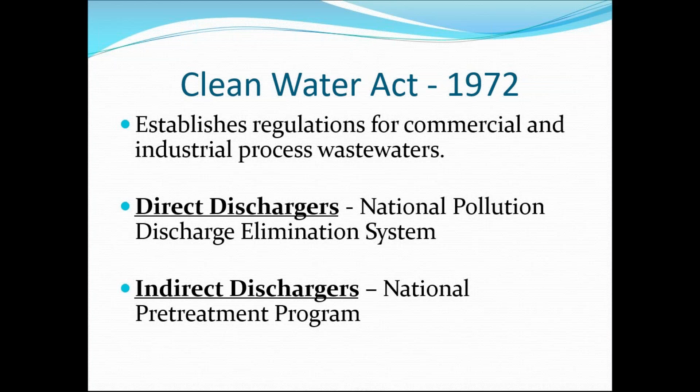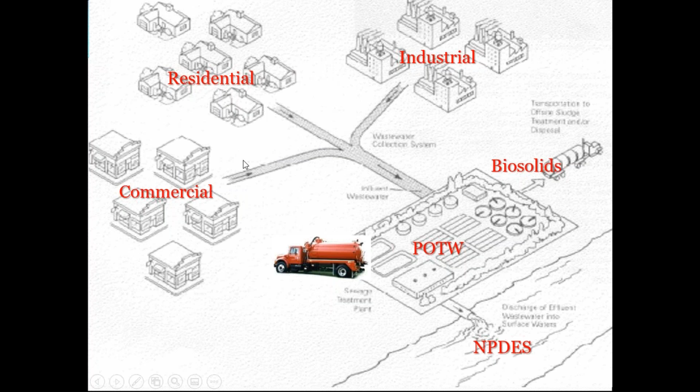So these are the elements that we are designed to prevent, to be proactive. Pretreatment is a proactive program. I combined all of the non-domestic into one little graphic here, but when they discharge to your POTW, a publicly owned treatment works is both a wastewater treatment plant and a collection system.

So pretreatment being proactive is designed to minimize or eliminate the issues that may occur in your collection system, such as obstructions with oil and grease, explosions that may happen from hazardous waste or vapors or fumes, and injuries to workers, which is very important to me.

Both when I was local and here at EPA, I'm very concerned about worker health and safety. We want to make sure we protect them. There's a lot of people working in the collection system and also at the wastewater treatment plant.

We want to ensure that we protect the biological and chemical processes of the wastewater treatment facility, to ensure that any non-domestic users, with high or low pH, don't create an interference condition on your wastewater treatment plant that may affect its ability to treat and cause pass-through into surface waters or violations of your permit.

Any partitioning of pollutants may also go to your biosolids and really impact your decision on whether or not you can land apply it, or have to send it to a landfill, or maybe have to incinerate it. So you really want to make sure that you're protective of those conditions at your treatment plant.

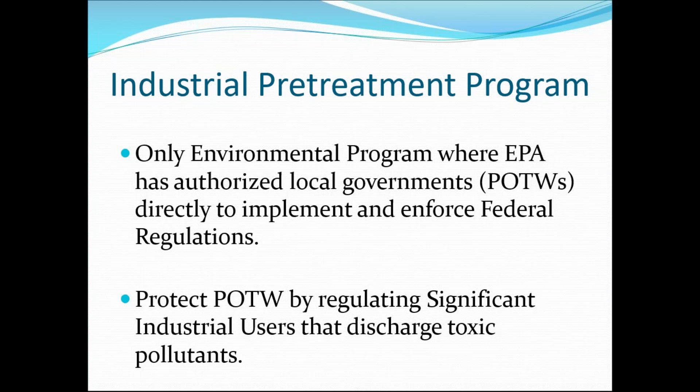Because a lot of times the chief operator, the voluntary pretreatment coordinator, is also the person who jets out the lines. They also can use some help protecting the wastewater treatment plant from any sort of non-domestic discharges that may occur in their plant.

Is there potential to discharge industrial loading in such a quantity, concentration, or volume as to cause impact to your wastewater treatment plant? That's what I look at whenever I go out and evaluate cities to determine if they need an approved pretreatment program.

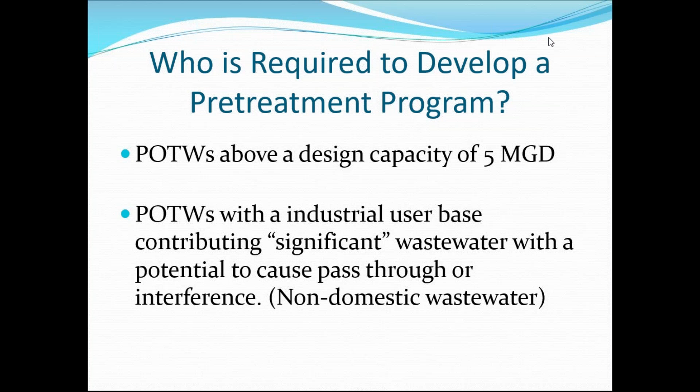So for me, audits are an ability to go out to that particular city to try to understand the city. I'm only there for a week at the most, so how much can I understand the city? I try to visit breweries, I try to visit coffee shops, I try to visit local restaurants just to get a flavor of the community, and then I'll also mountain bike if I can.

But I also want to get to know the pretreatment coordinator. I want to understand how he or she operates, how he or she thinks, and whether there's any opportunity for me to provide training, to provide outreach, and also to learn from them on how they operate and how they do things.

So I'll look at the legal authority, I'll look at procedures on how to implement the program. Again, we're talking about permit writing, sampling, inspections. I'll look at what is their funding, what is their resources, how defensible, how current are their local limits? Does their enforcement response provide the consistent response to any sort of violations that occur at a pretreatment program?

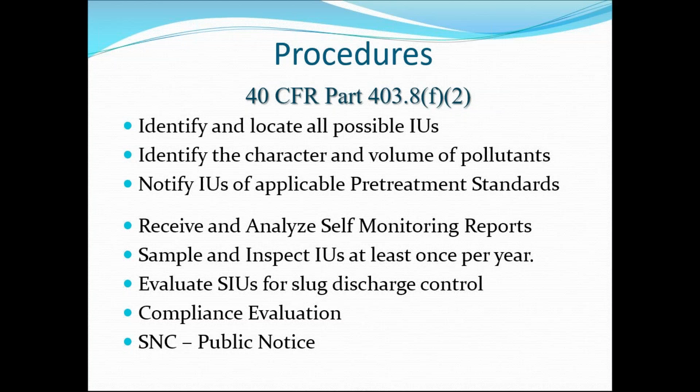For the industrial waste survey, this is an important piece of a pretreatment program. When I was a local pretreatment coordinator, we had 2 cities and 23 outside contributing jurisdictions or sanitation districts. It was a commitment for us to go out and try to identify industrial users coming in and out of the service area, and to figure out resources and collaboration with other districts to determine what pollutants you have, what is the character, what is the volume, and more importantly, what is the impact to your wastewater treatment plant.

So this is always a continual process. When I go out and do audits, I have a practical perspective on this. I expect commitment from the program, but I don't expect 100% of it to be current, because there's that human element. Let's face it, sometimes you have a bad day, sometimes a low energy week, sometimes things just don't work out professionally. So the important piece about this industrial waste survey is that you have procedures, resources, and commitment, and you're moving forward trying to identify.

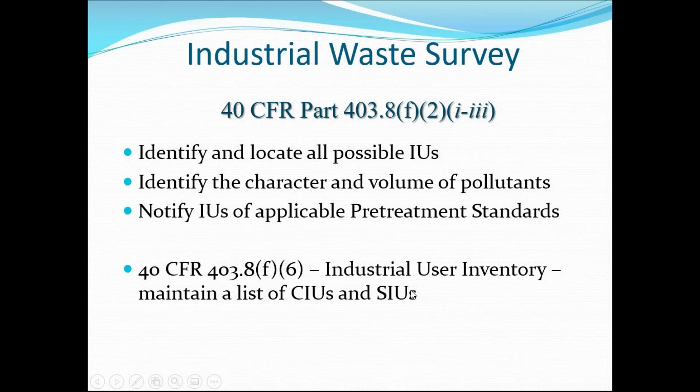The inspection part of it, how you gather information, is really important because you really want to get down to the industrial user inventory, where you start to develop this list of CIUs and SIUs in your service area. I'll get to that in a couple slides.

There's no doubt about it, the industrial user inventory is very important. This gives you your base of information that you then develop your pretreatment program and implement the procedures from. You really want to characterize who's coming in and out of your service area.

And Andrea, if there's any questions as we're going on, by all means feel free to jump in, and I'd be happy to talk about some of these questions. Yes, we'll do, Al. Thanks.

Okay, so again, I talked about the industrial waste survey, I talked about the facility inspections. What's really important too is follow-up activities, because if we go back to the regulations, you're required to identify industrial users, you're required to characterize them, and you're required to notify them of applicable pretreatment standards. So follow-up activities is very important - that could determine whether or not you issue them a permit or institute best management practices for them. I'll talk about that in a different slide down the road.

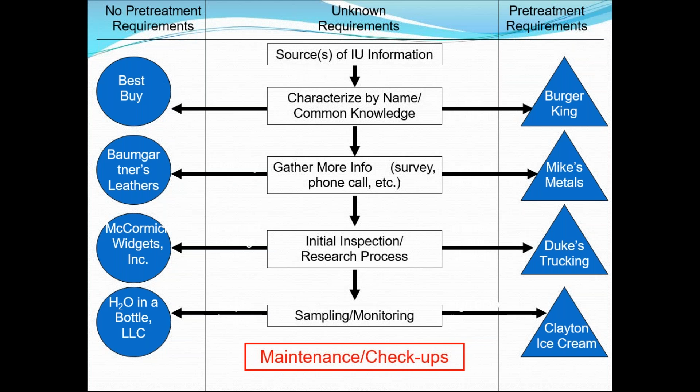The next one, equally important, are the general and specific prohibitions. Again, these are national - we have 8 of these, and they have different standards that you may apply for heat, for temperature, for obstructions. Trucked or hauled waste is one of them. I would always say the most important one for your local community are local limits. These are site-specific local limits, and I'll talk a little bit about this in my next talk on Thursday. Local limits develop site-specific standards for your wastewater treatment plant, your POTW, that are based on your current standards, based on current data of your service area, and develop an allocation that you can apply to the industry. So these are also really important. But really the way to develop and implement these standards is to understand that facility. So this is the difference between categorical standards and local limits - technology-based for categorical, technical evaluation for local limits. These are differences between the two standards.

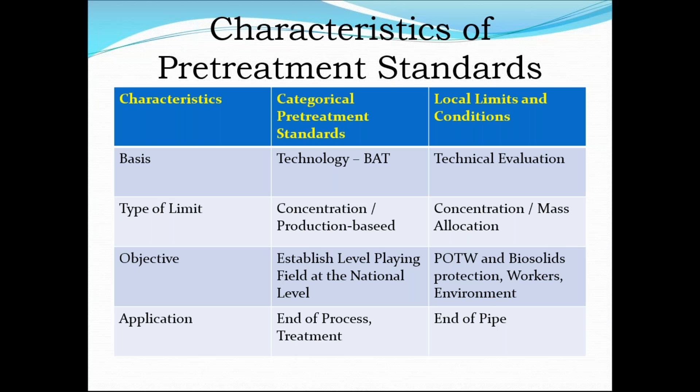Preparation is key. Whatever information I can get on that facility, whether that's talking to my city departments, community development, and getting an understanding of what this facility is and what they do, it would be really important. Any drive-by inspections I may do, I may drive around the back to see if they have any waste coming out. Any sort of preparation you have is really important.

For the SIU inspections you have under permit, there's obviously a lot more records, a lot more information. There's DMRs, there's past inspections, there's the permit, there's a fact sheet or permit rationale. Whatever you can do to prepare for this is very important.

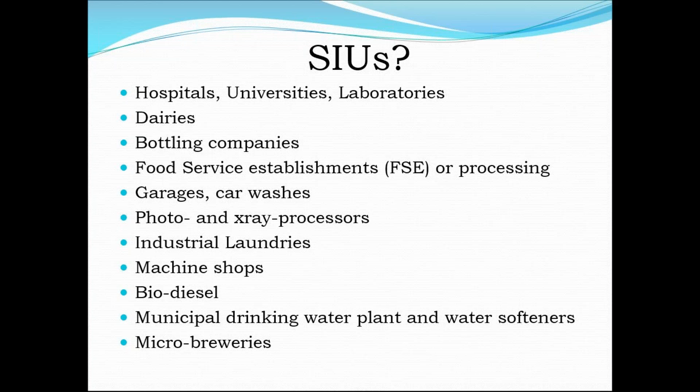Sampling is something that is very humbling, and there is a lot of preparation and adaptation to sampling. Here's some regulations I'll throw at you.

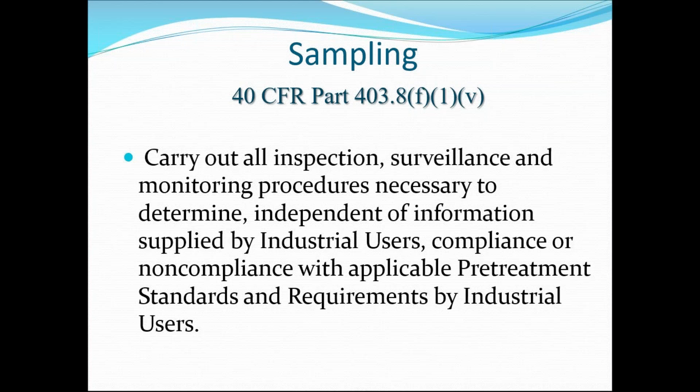You're required to carry out inspections, surveys, monitoring. You're required to surveil them, to gather information independent of what they provide you in the self-monitoring report or their own individual sampling, to ensure compliance and determine compliance or non-compliance with applicable pretreatment standards. So trust but verify. Ensure that your permit is concise and clean, with a good background to the regulations, so you're able to go out and gather information from inspections or sampling. You're required to sample and inspect them at least once a year, per 403.8(f)(2)(v).

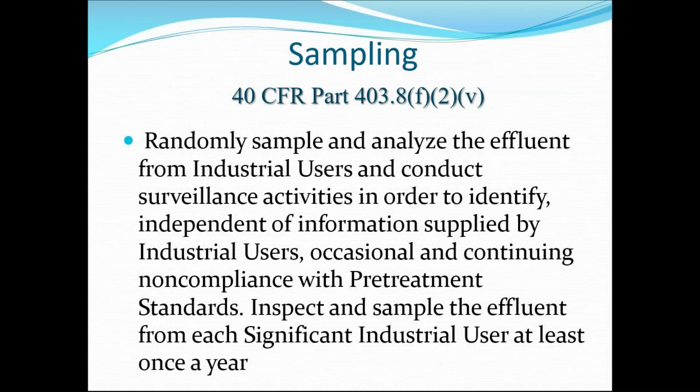These seem like really simple regulations, but there's a lot behind it. I've learned through experience that things happen.

It's different sampling in summer versus winter here in Colorado. It gets pretty cold in the winter, and I've learned that when I have an automatic sampler, to ensure the sampling van is heated up, and I put the hose on the vent of the sampling truck, or keep it in the room, because once you go out there and it freezes up, it's like a rock and not a flexible hose anymore. It's very difficult to put it into the place where you want to sample.

I've learned that sometimes when you put in a sampler, you need to hit the start button, because there's nothing worse than climbing down a 10-foot manhole under confined space entry, putting the sampler in the right location, putting the low flow probe in the flow, then coming back the next day to lift it up and all of a sudden it's empty. You realize you forgot to hit the start button. There is nothing more humbling than that - it's the worst feeling in the world.

I've learned that when you're sampling, always try to be the one pulling it up instead of the one at the bottom, because you don't want that sampler to accidentally overspill onto your body. There's nothing worse than that.

I've learned to ensure the sampler is correctly chained onto the iron. We used to have these crosses that we put on top of the manhole to ensure they're appropriately located so they don't slip down and have the sampler clog the collection line, because there's nothing worse than wastewater starting to rise up a 20-foot manhole and having to call the collection system to help because you're scared you're going to create a sanitary sewer overflow. These are the type of things that happen.

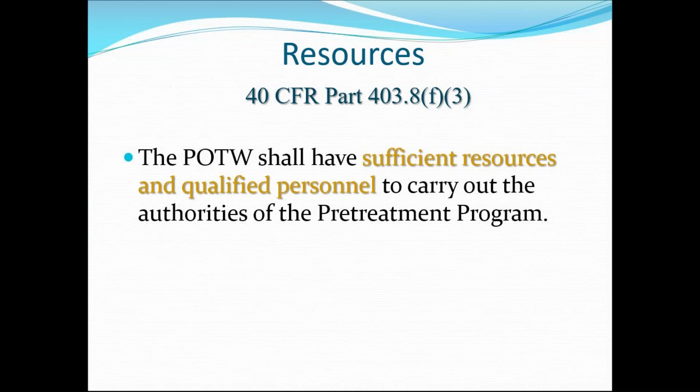That's what I have. If anyone has any additional questions—I know I'm a bit past the time.

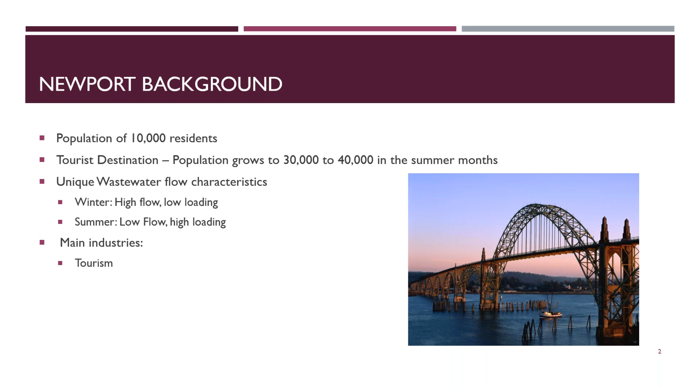So our main industries in town, obviously as mentioned, is tourism. We have about 125 restaurants, which is a lot of restaurants for a little town.

For fishing and fish processing, we have large commercial fishing with a variety of different types of fish. We have 2 very large fish processing plants, but they are not connected to the city system. They have their own discharge permits into the Yaquina Bay through DEQ. We also have a couple of small pop-up fish processing plants that only work when the season for that fish is in, and a fish meal plant, which is connected to our system.

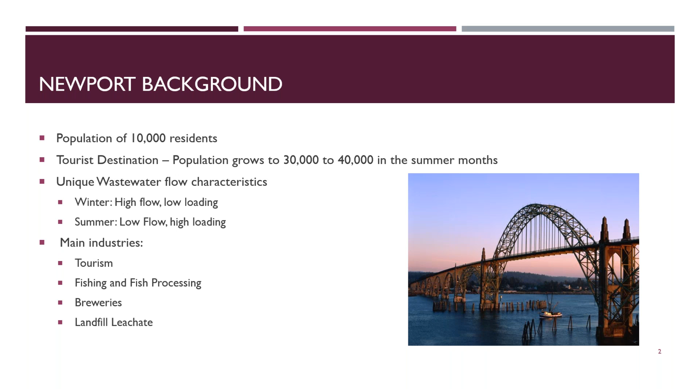We also have breweries, specifically one very large brewery, Rogue Spirits and Ales, and 2 smaller local microbreweries that don't distribute outside their own restaurants and brew pubs. We also have a covered landfill, and that leachate comes straight into our wastewater system instead of being hauled in. As I mentioned, Rogue Spirits and Ales is the largest industry connected to the sewer system.

As of 2017, this may be a little different, they were the 4th largest microbrewery in the state of Oregon, producing about 100,000 31-gallon barrels per year, give or take depending on the year. They do all their bottling on site, and in 2017 they started the Rogue Spirits Distillery, so they have another little system that they put in.

They really did not have any full wastewater pretreatment system until 2020, and that's kind of what this whole situation is about. There's a longish history with Rogue and the city. Rogue was never regulated by the city; periodically we would check in, but they didn't have to do anything.

Starting in 2017, we had a big personnel change in the city, and it became apparent that the wastewater treatment plant was at max oxygen demand for treating the organic loading in the summertime, when we had 40,000 plus people and everything running full swing. We were still able to meet the NPDES permit limitations, we weren't out of permit with DEQ, but they were at max, so there was no room for growth, which is a dangerous place for a city to be in.

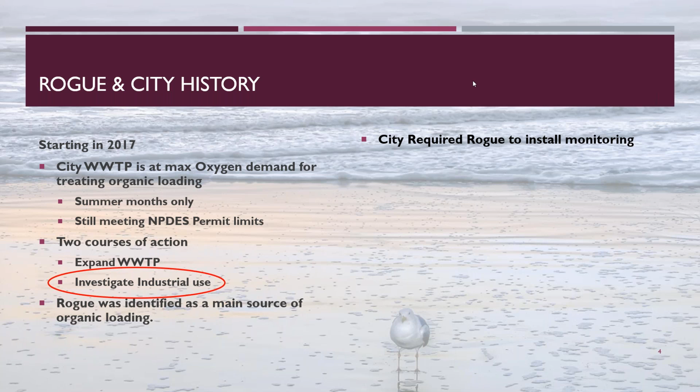So the city required Rogue to install monitoring, consisting of pH with an inflow pH probe, temperature, flow, and a composite sampler for BOD testing. This is city owned and operated, even though they had to deal with the cost of building it, and is used as a compliance point.

This monitoring revealed that they had a pH range of 2.0 to 14.0, which is essentially the entire pH scale. They were discharging temperatures as high as 156 degrees Fahrenheit. Their average flow was about 30,000 gallons per day, ranging from about 15,000 to 45,000 gallons per day. That's actually up lately, they've been getting up to over 50,000.

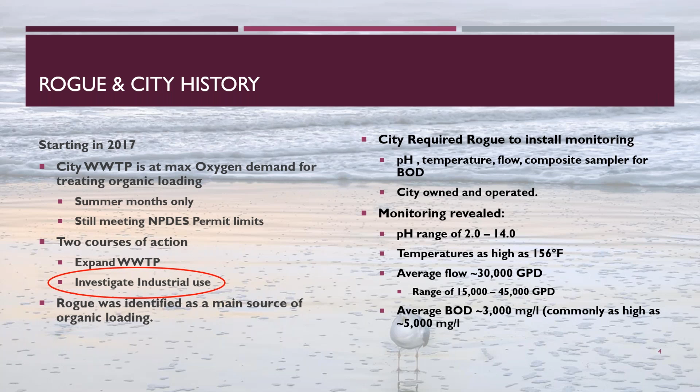With the BOD testing, the average BOD was about 3,000 milligrams per liter, and they got commonly as high as 5,000 milligrams per liter, sending 1,000 to 3,000 pounds of organic loading to the treatment plant on a daily basis. So obviously they are a significant industrial user per that.

Continuing that history, from the data we collected, we found that Rogue's BOD counts for about 50 to 60% of the wastewater treatment plant's organic loading in the winter months, and about 15 to 25% during the summer months. That triggered the determination that we have a significant industrial user and have to have a pretreatment program. Also, even with paying extra strength charges, they do not pay 50% of the wastewater charges for the city.

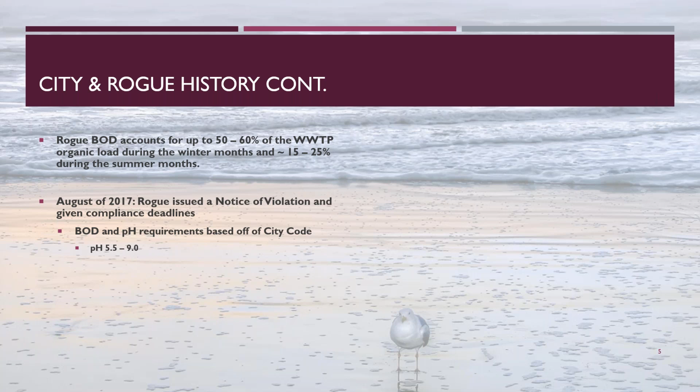So in August of 2017, Rogue was issued a notice of violation and given compliance deadlines that varied in timeline, with the most recent being pH and then TSS, and the longest deadline put out for BOD, because that takes more time to build a system that can handle it. The BOD and pH requirements were based off of city code and not anything else, a pH range of 5.5 to 9 and a BOD of 300 milligrams per liter. We did recognize that that BOD limitation was very low.

It's just especially difficult for an industry trying to address that. But really what happened was no deadlines were met, and in fact they ended up discharging a massive amount of low, acidic pH wastewater, and they killed our wastewater treatment plant. They actually killed our biological treatment system. So they received a cease and desist, which would result in their water being shut off, regarding pH and temperature discharges, because around that same time they had put in their distillery and discharged boiling hot water that melted our pipes, the city pipes. So we had some collection issues and some major treatment issues, and that was, I think, the breaking point—they were ignoring our requests and causing direct issues with the city.

So they did install a temporary pH stabilization tank. It worked a little bit—they didn't have quite the huge swing. Their range was still about 4.0 to 12, but when they first installed it, they didn't add any oxygen and it went septic, so that was another issue. Really the main problem was that they had their brewery operators trying to be wastewater treatment engineers, and it just didn't work.

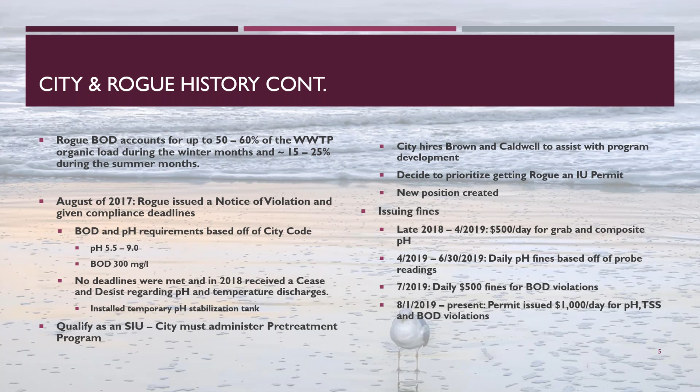So then in August, we finally issued them a wastewater discharge permit, and to now, we updated their fining amount to $1,000 per day per violation for pH, TSS, and BOD.

And kind of to go into the permitting process—our city code allows for special permits under the Public Works Director's authority. So that's how we were able to give them an industrial user permit essentially before we had a formal pretreatment program. We did use Bend, Oregon's brewery permits as templates. If you don't know, Bend, Oregon has a very large number of microbreweries and a pretty successful pretreatment program, so it was a good starting point for us as far as BMPs and other things.

What we did that Bend didn't do is set technically based limits, ceiling limits for BOD. Obviously, they have very high strength loading, so our BOD maximum daily limits went up to 2,200 milligrams per liter, about 500 pounds per day. These were based on our plant and what we can handle—flow and all of that—during our peak season, which was the summer months.

And then with a weekly average of 1,900 milligrams per liter, or 450 pounds, we set the weekly average lower just to keep them honest, to keep them from constantly doing the minimum treatment required to reach their permit limitations.

For pH, we expanded the range from 6.0 to 10 because our treatment plant could handle a little higher pH better than it can handle a lower pH. TSS had a daily max and a weekly average, one and the same at 1,000 milligrams per liter. And then a temperature limitation of 104 degrees Fahrenheit at entrance into the city system.

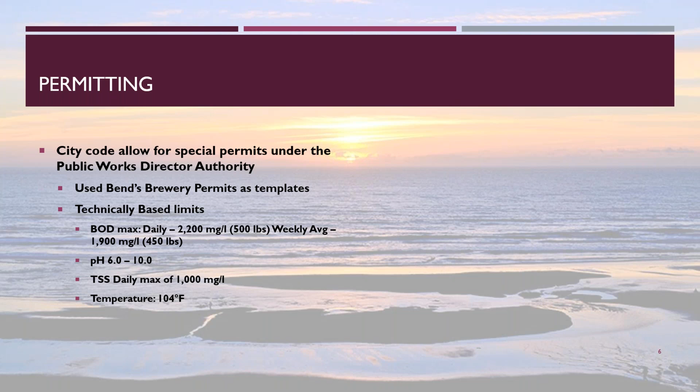It also came with self-monitoring reports—we're doing monthly monitoring reports right now—and notification requirements for spills and slug discharges, so that we know what's coming, because we've never had that with them. We would just wake up or start a day and there'd be issues and we wouldn't know.

So with that, we increased the fines to $1,000 per day from $500, just because that's also what's required for industrial user permits with a pretreatment program. So we really treated this permit as a significant industrial user permit.

The main reason is that when we have our pretreatment program approved, it'll help with a smoother transition instead of having to go through this process again. So that was kind of the main goal. We issued this permit in August of 2019.

And surprise, surprise, we've got major pushback from Rogue. They refused to sign the permit, but within city code, it was issued and signed by a public works director, so it was an actual legitimate permit.

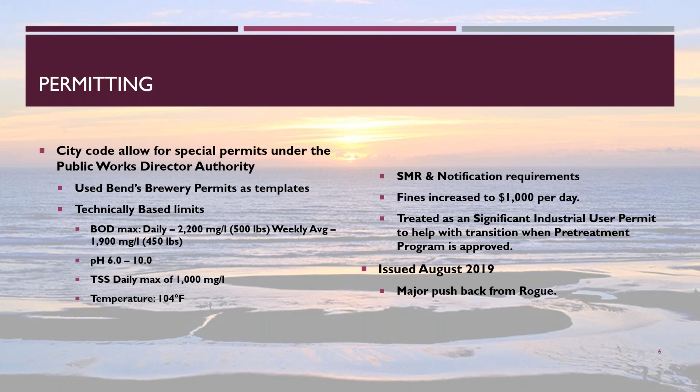They also refused to recognize any of the limitations, and they didn't pay any of their fines. So it was used, but they definitely threw a lawyer at it and tried to get out of everything, and kind of ironically still missed the 30-day deadline to actually issue any permit changes, but they did try.

So moving forward, as it sounds like everything's terrible, I promise a lot of things have gotten better. Right away, Rogue did hire lab technicians to do in-house testing for their wastewater, to test for BOD, and they finally hired some engineers per city request because we needed engineering plans for their pretreatment system—that was per our permit. So they did submit engineering plans for their system back in October of 2019.

First and foremost, there was a lot of technical and logistical concerns. At the time, they had bought a pre-made treatment system from a vendor, and it wasn't a system designed to meet their wastewater characteristics. It was just a standard run-of-the-mill system, and they didn't have the required storage capacity.

So after some back and forth, they officially got approved in November of 2019, and it was only for pH. It had a pH stabilization tank and system, and then a polymer and coagulant addition with a screw press to help take out some solids.

Obviously, if anybody understands wastewater treatment, that does nothing for BOD treatment for brewery waste, because a lot of it is high strength loading that is dissolved, not in a solid form, so you need biological treatment to take it out. But they did proceed with this because we can't really tell them how to do what they need to do. So we just have to let it work itself out.

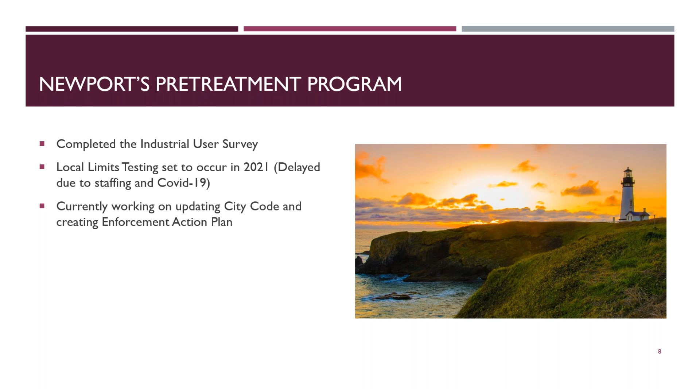So currently working on updating the city code and creating an enforcement action plan. For the code, I'm currently working on that right now, and I'm using the EPA model ordinance for that, which is a fantastic tool for starting.

And I'm doing it in-house, and that was kind of a personal preference of mine because I am the one that will administer this program, and I truly believe that writing and editing and toning, getting this code correct will help me be better at my job.

Our goal is to have this sent to DEQ for conditional approval by the end of the year and have the program finalized in the spring of 2021.

So to give a little background on the process for this, I'm sure someone's gone over it, but I'll go over it. For any official documentation for pretreatment program approval, we send the code and the enforcement action plan to DEQ for conditional approval. They say it looks good, it meets all the requirements, and then it comes back to us.

Then we do a 30-day public comment period, and implement anything that needs to be implemented from those comments. Then it goes to our city council, and they approve the code, and sign an official letter, and we send it back to DEQ, and they say everything looks good. It's officially put into the municipal code, and now you have a formal program.

So we're hoping to get that started soon. I'm about 80% done with the city code, and the enforcement action plan is kind of building itself, to circle back to Rogue.

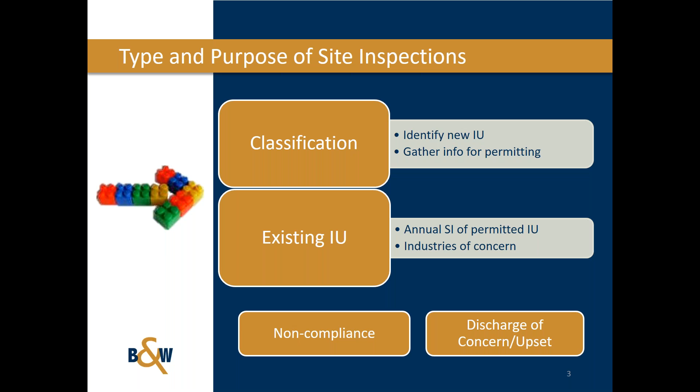Part of what I'm going to go through today is all in the EPA guidance, the new update from January of 2017. I say new because the previous version was from 1994. So this is some great information to be able to go through. It's called the Industrial User Inspection and Sampling Manual for POTWs. You can download it. It's a nice binder full of paper that you can download and print off or just save to your computer or your files and be able to go through it and search for information in there. But it is a wealth of information on site inspections. I urge you to go and hunt that down. And as I understand, all of these presentations will be available after all of the presentations are done at the end of this training session. So you should be able to get these links directly from this.

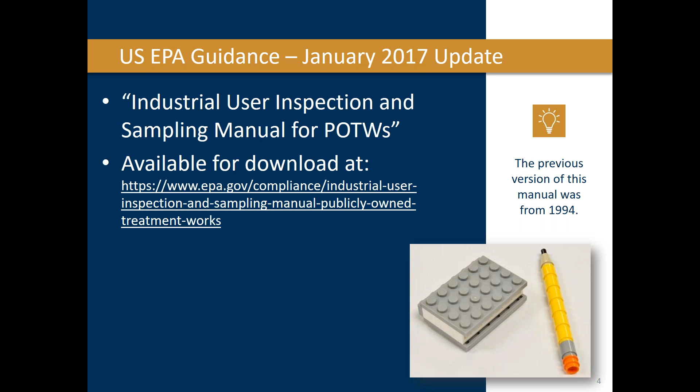So what types of sites should be inspected? Really, that's the first thing, is trying to figure out who needs a site inspection. So we identify a lot of those during an industrial user survey. This is the survey where you're really trying to gather information on your full service area and understand who is discharging waste to the treatment plant.

Those that might need a site inspection would be any that are discharging process waste to the treatment plant. Perhaps they've been very forthcoming and given you the information, and you understand, oh, this is a categorical process that we're going to need to go and better understand. It might be a high water user, might be someone that's in a problem area. If you have seen instances of those inks or wipes that are in the collection system, you may be able to go and actually find out who is causing those problems for you. Any food manufacturing, especially large food manufacturers that are using a lot of water, can be very interesting site inspections, especially if you're having trouble with fats, oils, and grease in your collection system.

Or perhaps you're looking for any specific discharge requirements. I know in Illinois, the current focus is on phosphorus, mercury with dental amalgam, any other metals or chlorides. Perhaps you're seeing a lot of copper or zinc coming through in the influent of the treatment plant, and you want to try and hunt that down. Those can be some that you can be looking for specifically when you're doing your industrial user survey and on your site inspections. But overall, POTWs need to know what is being discharged to their treatment plant. It can affect the treatment plant operations. It can, as the previous presenter went through, take down a whole plant. One industry can take the plant out of commission. So we need to know what people are discharging.

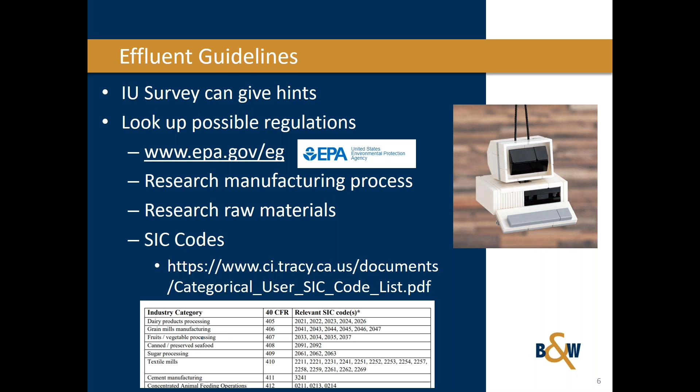Scheduling site inspections for classification, really the best way to do that is to start by talking to the authorized representative and determining who should attend from the business and who should attend from your staff.

As a consultant, we tend to go on these site inspections with our clients so that they know what is going on. But occasionally our clients are unavailable, perhaps something's going on at the treatment plant and they're not able to attend with us. So we sometimes do those solo, and that works well too.

We like to establish a specific date and time so that the industry knows when you're coming, giving them a little background on what you're going to be looking for and why you need to come in there. As Al mentioned this morning, going through your couple-minute speech of why is this important, why do we have to be here, and what we're trying to gather from this is a great way to really introduce yourself and explain what pretreatment is, because many industries don't know.

For large industries, it can take hours or days to go through, maybe they have a multiple building plant that you're going to have to go through. For small industries, it can be 45 minutes. Recently, I've had some that are as short as 15 minutes.

I like to send a confirmation email with that date and time of when I'm going to be arriving, so that they have documentation of it, and also so that I can sometimes get a confirmation from them of, oh yes, we're going to do this.

On the other hand, sometimes unannounced inspections are really what you need to do. If there is a specific issue happening at the plant, perhaps those issues of color coming through the treatment plant - if the whole treatment plant has turned bright blue, you might need to go do a site inspection right away to determine that compliance issue and understand what could be coming to the treatment plant.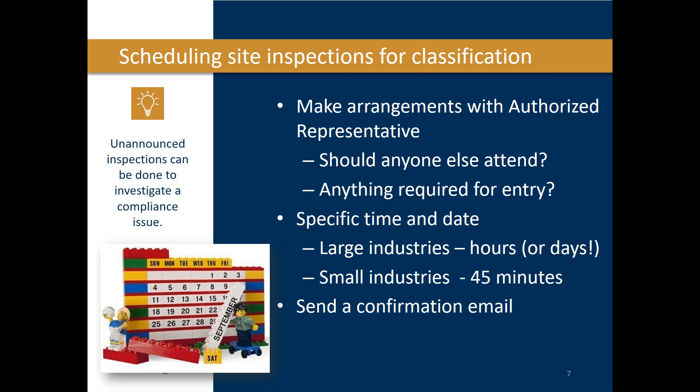Recently, I've started making the most of all of my hours in the day and creating a time window for arrival. So I'll tell the industry I'm going to arrive between 8 a.m. and 10 a.m. This allows me to really move from one site inspection to the next so that I don't have a lot of downtime in between.

We all are time crunched every day, it seems, so being able to just go from one to the next is really beneficial.

It does, however, require you to be very organized and ready to go. So I have all of my site inspection forms prepped. I order them and put a number on them of which one I'm going to do first. In the time window, I put that on there too. I also have the name and phone number of the contact person I'm going to be meeting with, so that if I need to call them and say, hey, can I come in 15 minutes early, or I'll be there in about an hour just to give them an update, they greatly appreciate that.

But I've had a lot of industries be just fine with me giving them a time window for that arrival.

All right, COVID-19 has changed basically everything about our world, and site inspections have certainly been affected by this. Illinois was in a shelter-in-place order through, I believe, the end of June. Goodness, time is flying now that it's November. But we had some businesses that really did not want us to come in and do site inspections in person.

We had the opportunity to really kind of pick and choose who we were going to do then and who we might need to do later. So I've done probably 20 site inspections from March 2020 until right now, with a variety of different concerns from those industries. So what we've had to determine is how many site inspections are actually necessary. Do we need to go there in person, or can we gather a lot of information over the phone or a video conference? Can they send us photos to help us through this?

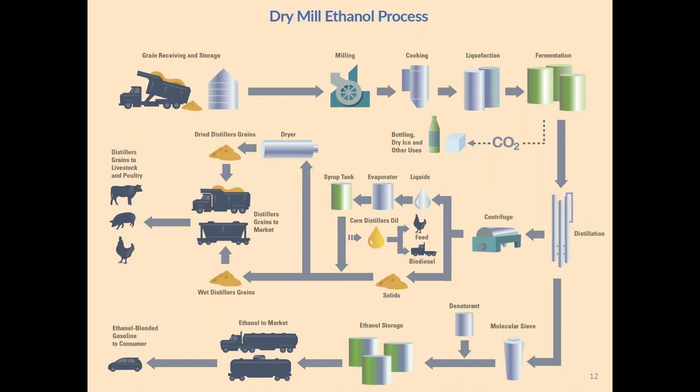So what do you need to bring, if you're going on the actual site inspection and you've determined you are going to show up in person? I always have business cards, I always have my identification with me. For several of our clients, we have a photo ID from the municipality itself saying that we are a contract employee. You have your personal protective equipment - we've heard PPE more in the past 6 months than ever before. You have your steel-toed boots and your hard hat, eye and ear protection, and a mask. Nowadays, in Illinois at least, there are mask mandates, so pretty much everyone has a mask on when you are with others. A lot of food manufacturing companies want you to remove your jewelry, so I usually leave that at home on site inspection days. And I have my trusty site inspection form that I'm going to fill out.

In the age of COVID, other things you might have to consider are: do you have to do temperature checks? Are there self-certification of symptoms? Are there any travel restrictions? I know Cook County in Illinois, which is where we are, doesn't want people visiting other businesses if they have been traveling for 2 weeks prior to a whole list of states. So we are trying to limit any transferring of COVID-19 to others. They might have travel restrictions in place at those businesses as well.

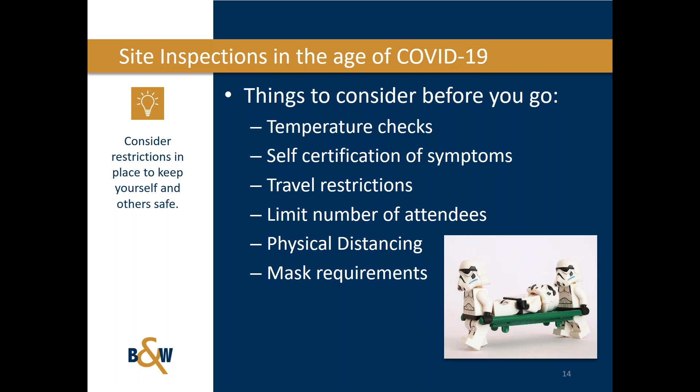Limiting the number of attendees with municipalities - as we are a consultant, the municipalities have been trying to limit exposure for their staff as well, and we've had fewer people come with on-site inspections than in the past. Physical distancing also goes along with limiting the number of attendees. If you're going to be sitting in a conference room, you can't bring 7 people with you to do a site inspection when really all you need is 1 or 2 key people from the municipality or the consulting firm. And then any mask requirements - keep yourself safe and make sure that you are prepared to go into a site inspection.

Our opening conference or meeting at a site inspection is really where you get a ton of information at the beginning. I always like to sit down and talk to the industry first and then tour the manufacturing facility. This is where you can explain why you're there and the nuts and bolts of 40 CFR and the pretreatment program, and what we need to be able to do on those site inspections.

Sometimes we'll get enforcement waivers or documents forbidding evidence collection. I'll go through non-disclosure agreements and proprietary information a little bit later, but really those are things we try not to even entertain the idea of signing. Sometimes they will want you to sign something, but basically we can say no, based on 40 CFR, we do not need to sign enforcement waivers or documents forbidding the collection of information. That is the whole purpose of us being there, and we have US EPA's documentation on that also.

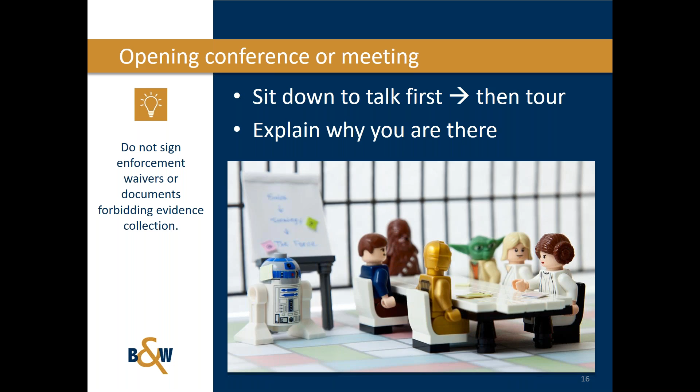The other thing I've been trying to do is gather as much information as I can during that initial conference, even over the phone before I go. Can we walk through the basic details of things over the phone with the industry to gather the basics, like how many employees they have and things like that? That can easily be done over the phone so you can focus your time more on the manufacturing areas itself.

It is very difficult - I've realized in recent site inspections that with the mask on and hearing protection in, it is hard to hear others. I did not realize how much I depended on lip reading in the manufacturing areas to gather information. So we really have to make better use of that initial conference or phone calls beforehand to get as much information as we can, so that the manufacturing area, if it's loud, is more of a show and show - not a show and tell, because you can't really hear much.

We also like to get emailed documentation. So if there are safety data sheets, spill plan training, or hauling records they're going to provide documentation of, those are great to have emailed to you rather than having to get hard copies. Limiting that time on a site inspection is really valuable to everyone. When we've been able to keep them short and sweet, it's a benefit to not only the industrial user, but yourself, as all of our time is limited.

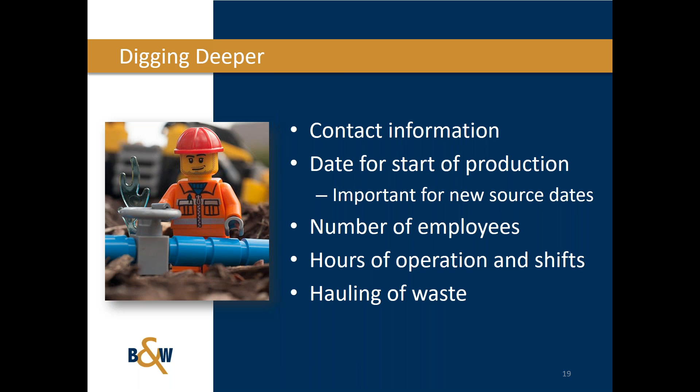Digging a little deeper, you want to understand their discharge location. Can you physically find the sampling manhole location outside, or would the only place to sample be at the end of process? It's yet to be determined. At some locations, they don't necessarily even know where the sampling manhole is, but if you have sanitary sewer maps, sometimes you can find those pretty easily.

Any spill plans that they may have in place? Do they have safety data sheets? And is there spill containment around any large barrels or tanks of things?

And then any facility cleanup. Some facilities are cleaning after each process. Some do an overnight cleanup, or some have a Saturday where they are cleaning the entire facility in one day. They'll wash down a giant food manufacturing area. You want to know exactly when they are going to be doing cleanup because that can affect their sampling and what could be coming from that facility.

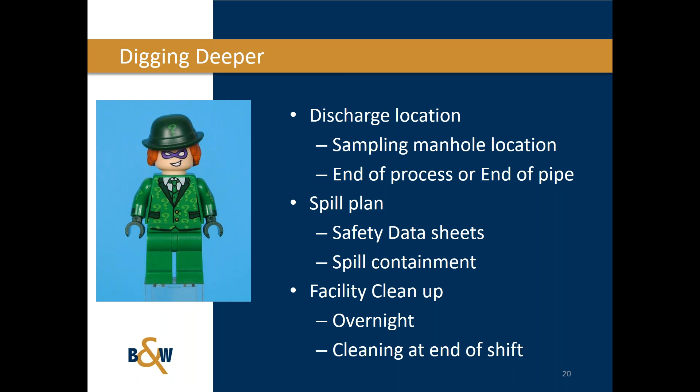So digging a little deeper for information, these are some of the questions that I tend to ask when I'm out there. How do you do that? What is that process called? Overall, they are the experts. So I like to try and have them explain, like, how did you get into this? How did you develop your business? When did you start doing that process? Where does that process happen?

Can you show me? That's my favorite question. Can you show me? Because sometimes they will have an actual employee of their staff make something for you right there so you can fully see exactly what they're doing.

Or if I'm trying to understand their process from beginning to end, I'll draw it out for them. Did I get this right? Do I have this in the right order? Am I missing anything? Are they doing all of those procedures on site, or are some of them being sent off site? So there's so many questions that we can ask, but letting them really show their expertise and being curious is just a great way to get information.

I tell every business that I go to that my favorite part of my job is getting to go do site inspections, because I get to see how things are made, and people really like to share their facility. Unless, of course, you have some that are just not happy to have anyone from the government there at all.

Going through that facility walkthrough, you need to make sure that you're being safe. Follow any protocols that the industry has given you. You're going to want to visit all areas throughout, from receiving of raw materials through shipping, to really understand exactly how it's being done. I like to take notes as I'm walking through, but I have learned that trying to walk, talk, and write all at the same time is really not safe, especially when there's forklifts flying through certain manufacturing facilities. We need to be careful.

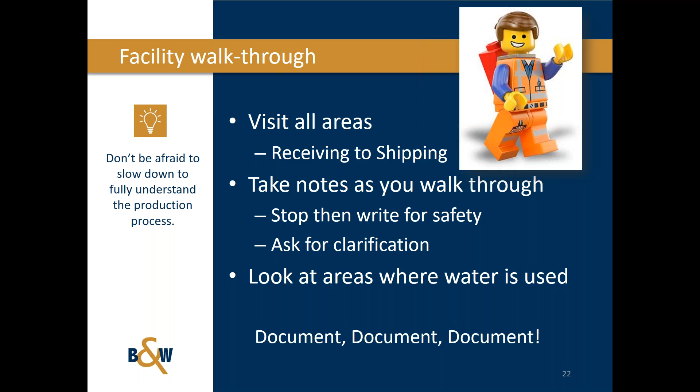In simplified, some site inspections really just don't need to be that lengthy. If you are going there and you're thinking, oh, this is going to be a really big deal, this is a big site inspection, and then you determine, oh, they're not doing what I thought that they were doing, it's okay to keep it short and sweet. Get a little bit of information from them. Went to a business recently that had been open since 1946, and they were doing some processes that would be a categorical process.

However, the discharge didn't go to the drain. It went to a little bin underneath that was filled with kitty litter, and they don't discharge anything from that. I was like, oh, this is not what I thought it was going to be at all. So we kept it short and sweet. I was in and out of there within 20 minutes and got all the information that I needed. I understand that there's zero discharge and they're a good one to keep note of, but nothing that we need to really be concerned with.

Site maps are a really great way to fully understand where everything is in a facility and how different things work. So we tend to grab fire escape maps if we can possibly get them, or sometimes businesses have a full setup of everything written out for you that you can get in advance or even during the site inspection. Being able to take notes on a printed out site map during your site inspection is a wonderful way for you to really understand it. I typically point to things on the map and say, are we right here right now? Because I will get turned around in a large manufacturing facility very quickly.

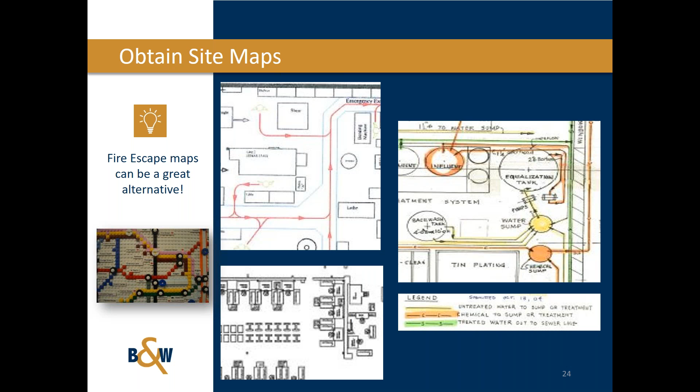Process diagrams. This is an even better place to ask the question. I thought the last slide was, but I'll throw this out there. We did have a question, so perhaps you can go into a little more detail with this slide. They're wondering if you can explain a bit more the difference between an outfall and effluent.

Well, the outfall of a facility, really the effluent that could be coming from a manufacturing facility could be going to the sanitary sewer, or it could be hauled waste. So I'm not sure if I'm fully understanding. In this case, the one that I'm showing here, this is more where water is coming in, and this is a pretty complicated process diagram that is showing different things. So the outfall that is on here is potentially going to a river, or it could be going to the actual POTW. Their administration building is going to the POTW, but in this case, they have multiple different things happening at this facility, where there's stuff going to the storm sewer, there's stuff going to the sanitary sewer, or perhaps it's going to a river or a stream as well. Things can be very complicated. I'm not sure if that was the correct answer to that question.

I think so. You said that generally effluent is the processed waste that's leaving the facility, and the outfall is the actual structure that the effluent comes through when it enters the POTW. Right. Okay. Right. Yeah, thank you.

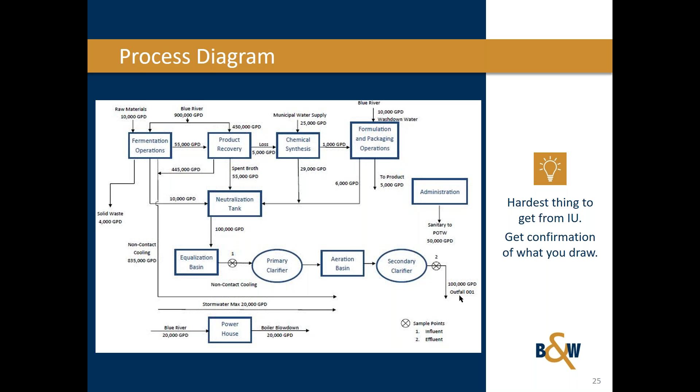The guidance document that I talked about before from EPA really goes through and provides a lot of great questions that you can ask of industries when you are there. I urge you to go through and find some of that information. If you know that you're going to a certain type of business, you can see what types of questions it recommends you ask. For an auto body repair and paint shop, you might want to know what kind of paint booths have a water curtain, or what they do with any unwanted paint. We want to make sure that they're not just dumping that down the drain.

Auto washes, a lot of cleaners, potential phosphorus use. Like I mentioned, in Illinois we're hunting down phosphorus right now. So sometimes looking for those minute sources can really be a great way to find, okay, this is a little bit coming from this car wash, but really nothing of concern. Do they have settling tanks, or are they cleaning the interior of tank trucks? That is a much different issue than just cleaning the outside. If they say, oh yeah, we're just a truck wash, well, are you cleaning the inside of tanks? If so, they might be transportation equipment cleaning.

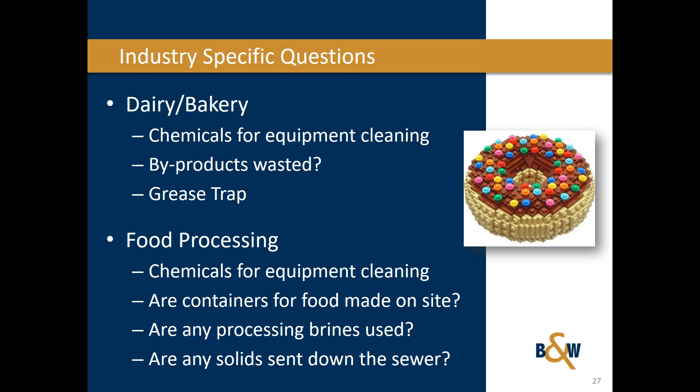Or a dairy and bakery or any food processing, we want to know what kind of equipment cleaning they're doing. Are there any byproducts? Do they have a grease trap, and how often is that going to be maintained? What exactly are they doing at the facility? Are they making the actual containers the food is going to be in, or are they just filling those containers? Do they have any brines? What is being done with their solids? Are those being hauled off site to be used as feed for other animals or things like that? We've seen that in a lot of cases in the Midwest.

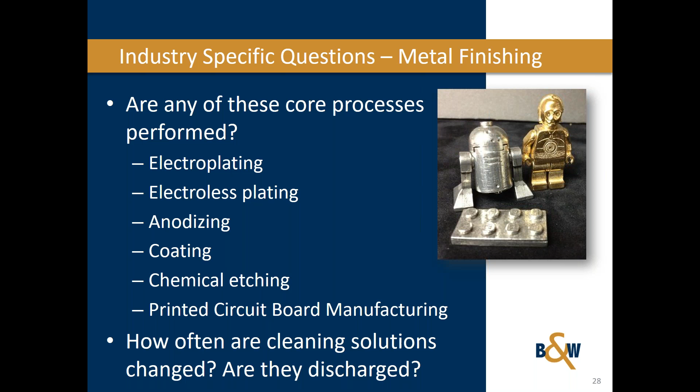Metal finishing is always a fun thing to try and find. There are a lot of core processes: electroplating, electroless plating, anodizing, coating, chemical etching, and printed circuit board manufacturing. Those are the key things you're looking for in a categorical metal finisher. You want to understand exactly how often they're cleaning their solutions, whether those are being changed out, and if they are discharged. There's a lot of different little things you can get into with metal finishing, but once you get down to whether it's one of those top six, that's how you determine if they're going to be a categorical industrial user.

Laboratories are very interesting to walk through, understanding the different types of waste they are generating. How are they treating their glassware? Is that being washed? Are they using acids for that? Are they doing any kind of neutralization before discharging? Perhaps they have pH neutralizers they are going through. And how are they treating any pH probes? How often are those being calibrated?

One other business I saw over the summer, I thought, oh gosh, what are they doing at this facility? They're using so much water, thousands and thousands of gallons a day. And I thought, oh, they're probably going to be a significant industrial user, because the name of the business sounded like they were a food manufacturer. Nope, they were a giant greenhouse. They were using a ton of water to water hydroponic tomatoes, which actually I have bought in the store before. So it was fun to see the actual facility where some of the things that are made or grown are what you actually buy yourself. So a high water user might not necessarily automatically be a significant industrial user, because they're not discharging anything — the plants are taking all of that water instead.

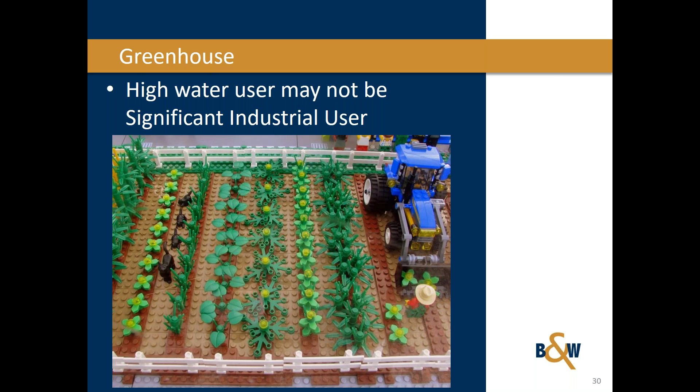So now we're going to get into some of the questions we go through, or the things we hear on site inspections. I'll often point to a different machine and say, what exactly does this machine do? Over the summer, I identified an industrial user that we thought we were just going to confirm their classification as a metal finisher. Come to find out, they were doing metal molding and casting, which is a categorical process. But the municipality themselves hadn't realized this was a categorical process, because the machine itself looked very benign — just a small machine that didn't look like it could be doing a categorical process, and it also used just a very small amount of water.

We will often hear, oh, it's only just a little bit of water, we're only sending a little bit of water. A lot of businesses will think that because it's a small amount of water going to the treatment plant, it's not of concern to the overall treatment plant itself.

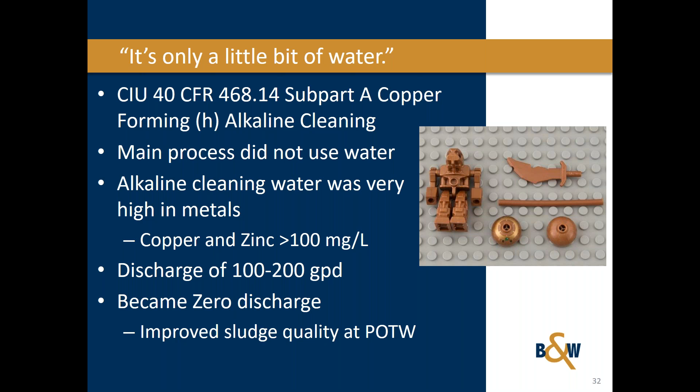Sometimes it's just that small source that you're not realizing. It's a small amount of flow coming from that facility that can be really high in metals.

I also heard this recently: it's a closed loop system, nothing is going to the drain. So I visited an iron and steel manufacturing facility. They were doing acid pickling, and said it's a completely closed loop system, nothing goes to the drain. When I actually got to their facility though, I said, okay, show me exactly what you're doing.

I thought they were zero discharge until they showed me the fume scrubber. I asked where does the fume scrubber discharge go? They said that goes to the sanitary sewer, but nothing else does, so it's really nothing of concern. But that fume scrubber waste is regulated under 40 CFR 420 iron and steel manufacturing. So you really want to understand and research every little bit that could be going to the treatment plant, because even that fume scrubber discharge was regulated.

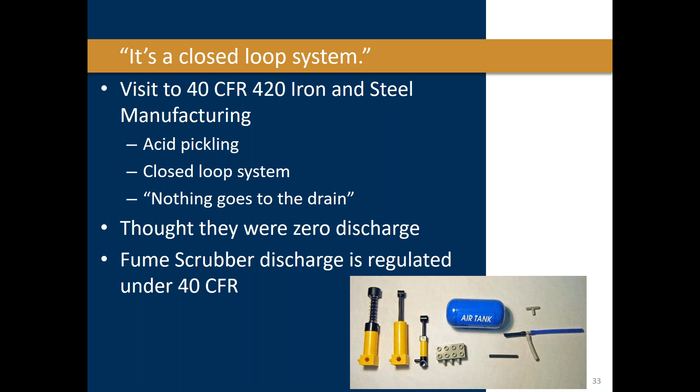We hear all of our chemicals are environmentally friendly. It's not always what the chemicals are doing, but what the chemicals are washing off. For that alkaline cleaning, they say, oh, we pH neutralize everything, but it's about what is being cleaned and what could be going to the treatment plant from that chemical that's washing it off. So sometimes we're looking deeper into that and trying to better understand it.

I had one business that just said, oh, we just squeegee that cleaning water right out the back door. I kind of choked for a second, but said, okay, that's unique, can you tell me a little bit more about that procedure? How do you do that exactly? So they were squeegeeing cleaning water from the inside of something out the back door to the storm sewer instead. It was probably not something super harmful, but they did not have a permit for that use at all, and it should have been piped inside to go to the sanitary sewer so that waste could be properly treated instead of going to the storm sewer.

So sometimes we'll get an interesting response when you're going through something and ask, tell me about that. If you don't act surprised and tell them immediately, oh no, that's horrible, you can't do that, you can get all the information you need by just having them explain it. We sort of plead the fifth as we're going through, sometimes having them explain what they're doing without fully letting them understand that no, that's not going to be an appropriate procedure going forward.

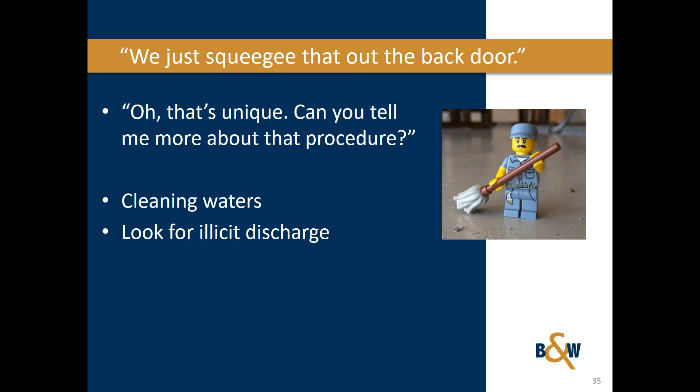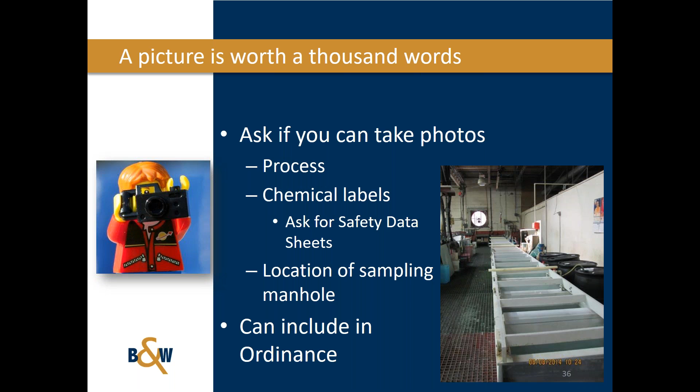I know Al was talking this morning also about being able to take pictures. Sometimes we just ask flat out if we can take photos, and it can be very helpful to jar your memory when writing up all the notes. You can document their process. I like to take photos of chemical labels. If they say, oh, we'll get you safety data sheets in a couple days, I can just take a picture of it, and sometimes I can find what I need based on what's on the actual chemical label itself. A location of a sampling manhole, if you want staff to come back and take a sample in the future, you'll be able to point them right in the direction of where you want them to go. As Al mentioned this morning, you can include that in your ordinance itself, that you would be able to take photos and have that documentation, because it can help to better understand exactly what they are doing at that facility.

We all want to understand what their solid and hazardous waste is, what is being generated, and where it is going. Exactly how is that waste going to be disposed of? Is anything recycled within the facility itself before it's discharged or hauled? And how often is it being hauled? Can they provide their hauling records so you can see those and understand what is being taken away? And do they have any sludge, perhaps from a pretreatment system, that is being hauled off, and understanding exactly where that is going?

Speaking of the pretreatment system, do they have one? What exactly is in place that is helping them treat their waste before it's discharged? Or perhaps their pretreatment system makes it so they have no discharge at all, like an evaporator. I visited a facility recently that evaporated all of their waste, and their sludge was hauled off because they did not want any discharge from their facility.

How is that pretreatment system used, and what are their chemicals? Perhaps they're doing pH neutralization, and you want to know exactly what they're doing to neutralize their waste. Is their pH probe being calibrated? Are they testing? Are they keeping records of that testing beforehand? Perhaps they have a full lab doing diagnostic testing before they even discharge any of that waste.

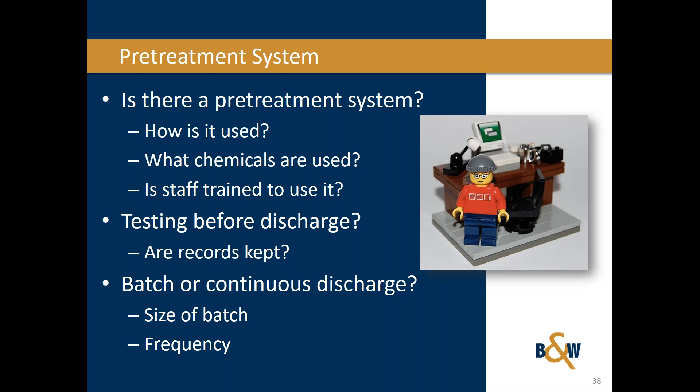Is it a batch or a continuous discharge from that pretreatment system? What is the size of the batch? What is the frequency of it? Sometimes the waste would be just fine discharging, as long as they aren't discharging a very sizable batch. If they're discharging 5,000 gallons of something to the treatment plant, it could be a slug load. If they broke that up and discharged it continuously instead, it might not be an issue for the treatment plant itself.

We like to look into chemical storage as well, and where things are stored in their facility. Do they have large tanks we need to be concerned about? Are there floor drains? I always want to know if they're capped or open. We want to know if there is spill containment, and is that spill containment adequate and properly sized for what is there, especially for tanks that could be outside, right next to a floor drain.

Are their tanks double walled? If it's going to get hit by a forklift, is that going to cause a huge issue? Do they have cleanup kits and a spill plan so their staff knows exactly what they should do? We'd like them to keep spill plan training records, and we get a copy of that so we know they are doing that training annually.

Then your closing conference. I think this is very important, especially now during COVID, to ask for clarification, get any missing information, and discuss next steps with them. Some businesses want to know exactly what you're going to do with this information, so you can say, oh, we'll follow up with you with a letter.

I like to go back and summarize my notes right away, as soon as I can, and write up a full report of what we found at that facility. But I really don't like to tell them what their classification is or what the next steps are until I have the opportunity to go back.

Once in a while we'll do a facility inspection and I'll think, oh, I need to go research this and read up on the regulations before I'm able to make any determination for them. So I'll keep them in suspense a bit and say we'll get back to you, I'll follow up with an email and some further questions after I've had the chance to review the regulations.

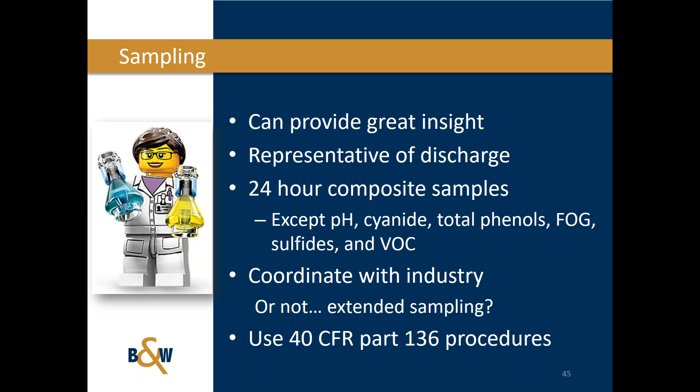We did have a question for you. Someone was asking about the dynamic around the relationship between your consulting firm and the POTW. Are the inspections completed through a contract with the POTW, and how is enforcement and compliance managed?

It can get a little complicated. Yes, we have contracts where we are working with our clients, the municipalities, to in some cases run their full pretreatment program. All the day-to-day pretreatment program goes through us, so it's in their ordinance that they have a consultant doing that. In many cases they will join us for site inspections, and all of the notices of violation are with them on it.

So we are doing things with their say-so every step of the way. When we're doing an industrial user survey, I will call those industries and say I am calling from the village of blank on behalf of the village of blank, and I will say that I am from Baxter and Woodman. So all of the industries we are working with as we do site inspections know that we are consultants. Sometimes that causes issues.

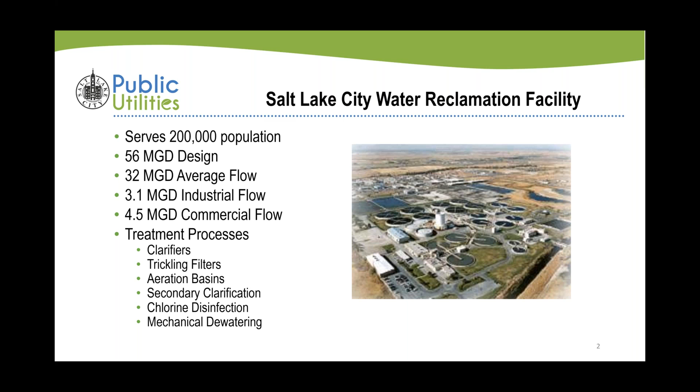Before we get started, I want to give a brief overview of the Salt Lake City Water Reclamation Facility. We serve a population of about 200,000 people, and our treatment plant is designed for 56 MGD, averaging 32 to 36 MGD daily. Of that flow, about 3.1 MGD is industrial and another 4.5 MGD is commercial. Our treatment processes include clarifiers, trickling filters, aeration basins, secondary clarification, chlorine disinfection, and we've recently begun mechanical dewatering.

Salt Lake City is currently building a brand new treatment facility in order to meet limits set by the Utah Division of Water Quality. These nutrient limits will include phosphorus and nitrogen limits, so to meet them we are reconstructing our facility, which is about 55 years old. The new facility will be up and running by January 1st, 2025. As part of it, we will do dewatering and add biological nutrient removal treatment options to ensure those limits are met.

As far as the pretreatment program in Salt Lake City, we have about 100 permitted facilities, both SIU and CIU users. Some of the categories we deal with include 413 electroplating, 415 organic chemicals, plastics and synthetic fibers, 417 soap and detergent manufacturing, petroleum refining, 423 steam electric power generating, 428 rubber manufacturing, 433 metal finishing, centralized waste treatment, pharmaceutical, transportation, ink formulating, metal molding and casting, and electrical and electronic components, just a few of the many categories we deal with daily. One reason I love this program so much is the variety it provides. It's never a dull moment, there's always something going on, and it's fun to see the different categories.

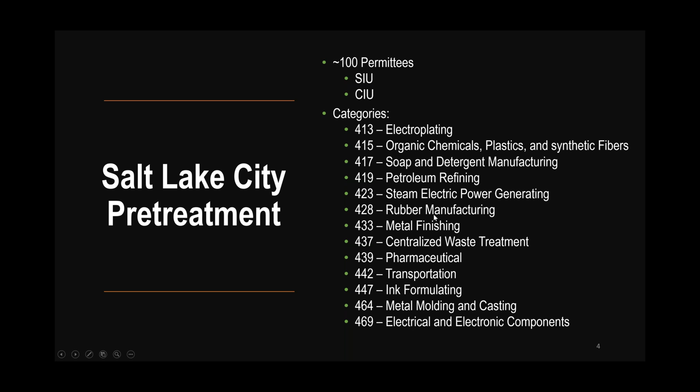Before we do inspections, we always want to consider safety, taking into account physical hazards, chemical hazards, atmospheric hazards, and what PPE we need to conduct a safe inspection. When we first go to a facility, it's easy to see their general housekeeping status, making sure there are no hoses, cords, or chemicals left out in the open. Do facilities store their chemicals in proper containment and separated? And what atmospheric hazards might you encounter at a permitted facility?

One of my favorite examples was during an on-site inspection at a permitted facility, we walked by a building and I turned to the company representative and said, 'Oh man, that does not smell good.' His response was, 'Hey, don't even worry about it, you get accustomed to the smell.' But really, do you? No, you actually become desensitized, and it is still a safety hazard. So you may want to consider wearing atmospheric monitoring depending on the facility you're inspecting. Also, don't ever put your safety at risk - it's just not worth it.

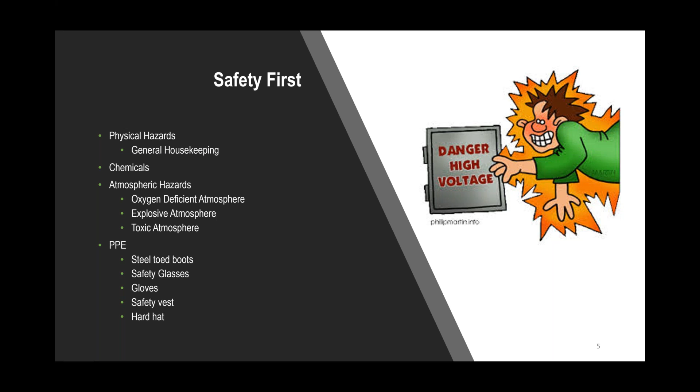So we are sewer spies. That is our job - we are there to make sure companies and businesses aren't doing anything illegal or anything that will harm the sewer system, the collection system, or the POTW, or endanger the health and safety of workers or the public.

Conducting inspections can be quite intimidating, especially as you're first starting in pretreatment. I know it was very intimidating for me. So today I'd just like to share a couple of industries that we have in Salt Lake and offer a unique perspective into what we have seen and what you can do for your industry inspections.

The first industry I'd like to walk through is the Salt Lake International Airport. This is a very large facility with over 7,000 acres and 4 runways. In 2019, almost 27 million passengers flew through the airport, though that's now a lot lower due to COVID. Of that 27 million passengers, there were almost 345,000 takeoffs and landings, equating to about 900 takeoffs and landings per day, with over 370 scheduled nonstop flights to 99 cities on average. It's the 23rd busiest airport in North America and 85th busiest in the world. I know some of your cities have a lot larger airports, but this is pretty big for us.

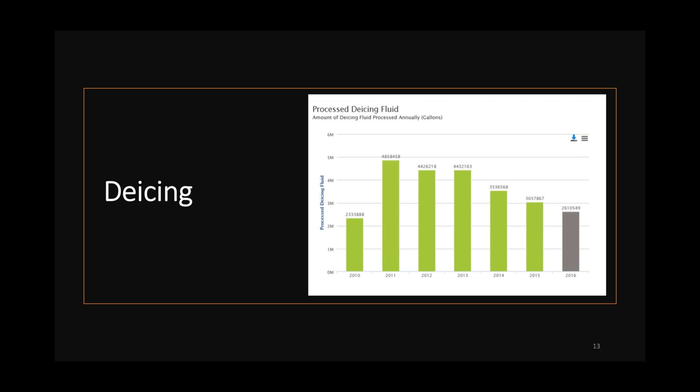So what is propylene glycol? It's the major component in de-icing fluid. If you just had propylene glycol, it has a very high BOD concentration, anywhere from 500,000 to 1,000,000 milligrams per liter. This can create a huge oxygen demand on your system, as well as have some impact on aquatic toxicity. Also, depending on the mix of de-icing fluid being used, phosphorus could also be a concern.

The amount of fluid used to de-ice a single jet depends on the nature of the precipitation event and the size of the aircraft, but it can range from several hundred gallons to several thousand gallons. Therefore, de-icing a single jet can generate a BOD loading greater than 1,000,000 gallons of raw sewage. As you can see, this can have a huge impact on the collection system and the POTW.

To help recycle the de-icing fluid runoff even more, the Salt Lake City Airport bought some machines that go out and gather and collect fluid that has left the de-icing pads. And 49 to 80% of de-icing fluid runs off the jet being de-iced.

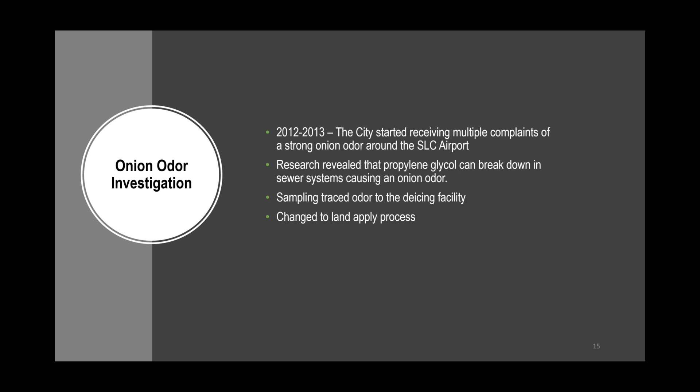As a result of this investigation and the odor complaints, the Salt Lake City Airport applied to the Division of Water Quality to change their process into land apply, thus saving the sewer system and preventing further complaints of odor. This change happened in 2014.

Prior to being land applied, they were permitted to discharge based on the concentration of COD. So the lower the concentration, the more they were able to discharge to the sewer system.

And the higher the concentration, the less they were able to discharge. As far as the pretreatment system that the facility had on site, it would follow this order: a plate clarifier, a water softening system, ultrafiltration, ion exchange, reverse osmosis, activated carbon, and the final step was a mechanical vapor recovery unit. The wastewater separated from the propylene glycol was land applied, equating to about 2 to 5 million gallons applied annually.

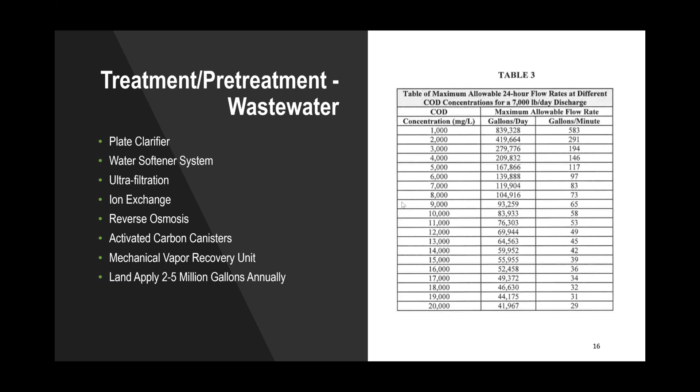So what sort of questions should you be asking at a facility like this? First, one of the biggest concerns is whether there is a bypass. Is there a way that a slug load of propylene glycol could enter your sewer system? What are the possibilities of a spill or slug load reaching the sewer? The facility has multiple tanks and chemicals stored on site that could prove to be a potential problem for slug loads. What is the endpoint of the product?

What happens with the propylene glycol that is recycled? Is it stored? Is it sold? Where does it end up? Is there hazardous waste generated in this system? How does the land application system work? And what type of PPE does staff use to protect themselves? These are not all the questions that can be asked, just a few to get you started on thinking about what you should ask during inspections.

Sometimes you just never know what you're gonna find when you go to visit different facilities. The next facility I would like to talk about is a chemical manufacturer. We have a very large chemical manufacturer in Salt Lake City, and they can be very challenging to work with.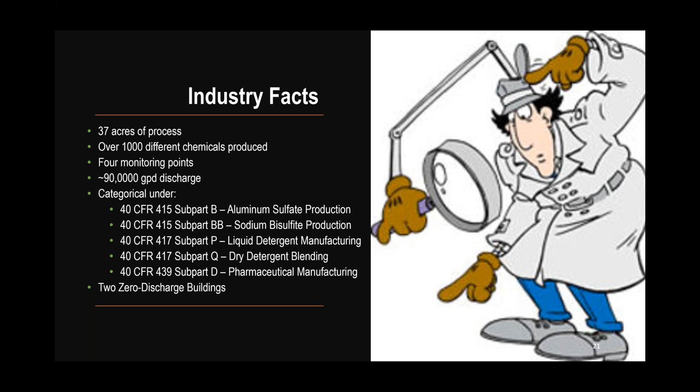As far as pretreatment standards, let's check out the regulation and the process, and what the requirements are. For 40 CFR 415 subpart B, our aluminum sulfate production, that requires zero discharge—they cannot discharge any water related to that production process. No cleaning, nothing—no water can go down the drain.

For 40 CFR 415 subpart BB, our sodium bisulfite production, the regulated pollutant is chromium. For 40 CFR 417 subpart P, our liquid detergent manufacturing, that requires COD to BOD7 production ratio reporting. For 40 CFR 417 subpart Q, our dry detergent blending, that is also a zero discharge production process.

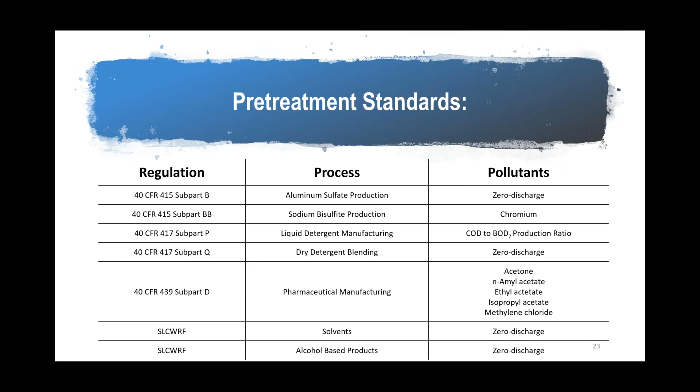So what sort of pre-treatment system do they have at their facility? We know that they have 4 different monitoring points, and each monitoring point has a different pre-treatment system. For monitoring point 1, that includes brines, boiler blowdown, and drainage, coming from building K, which had nitrate and nitrite compounds, as well as building L.

Monitoring point 2 is their largest pre-treatment system, taking flow from 4 of their buildings, including some categorical processes. The pre-treatment system includes settling ponds, an EQ tank, pH adjustment, flocculation, and settling. It's also attached to a sludge drying bed, and before discharge they pH test again. Through that monitoring point, we see about 29,000 gallons a day going out the door.

Monitoring point 3 is their pharmaceutical categorical monitoring point. They have an equalization tank and pH adjustment, discharging about 4,000 gallons a day from their pharmaceutical process. Monitoring point 4 is the final monitoring point before all wastewater leaves the facility. This monitoring point also takes in some buildings, and they pH adjust, defoam, and pH test as it goes out the door.

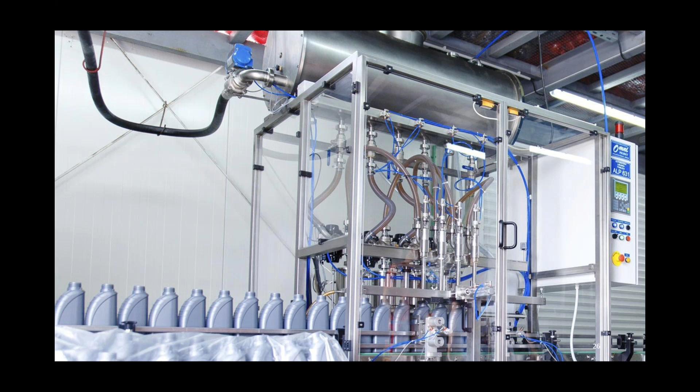So what do we need to look for in a detergent manufacturer? This is a picture of your standard typical detergent line. They'll have bottles go through the processing, you'll see them filled up, they'll cap them and get them ready to ship. Some facilities will also do their own bottles. They'll blow mold, and that is usually a non-contact process and will discharge to the sewer system.

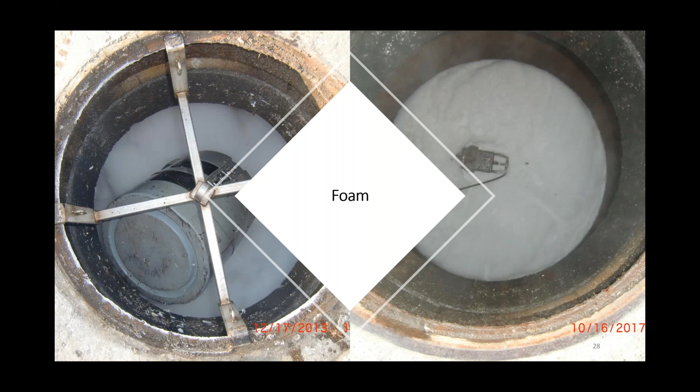One of the biggest concerns with detergent manufacturers is foam. As you can see from these pictures, this manhole is probably about 8 feet down in depth, and the foam is so thick and so high that it has knocked our composite sampler off the hanging and ruined the sample. These pictures were taken at various dates, so this is a consistent problem we experience with detergent manufacturing. The city of Salt Lake has more than one facility that manufactures detergents, so sometimes it can be very hard to identify which facility is causing foaming issues once it hits the POTW.

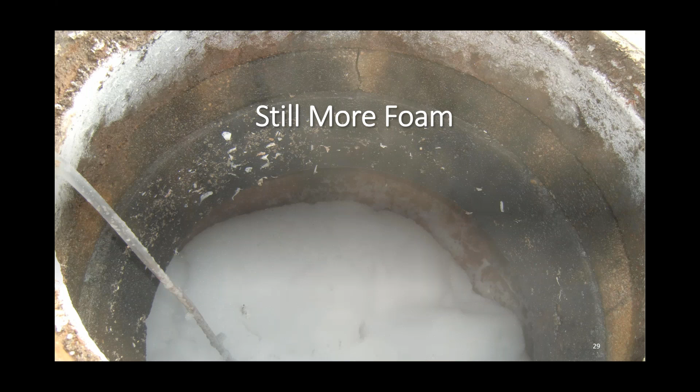And if that's not enough, there's always more foam. You can see that it goes all the way up the sample tubing and all the way around the top of the manhole ring. So they can cause quite a lot of foam, and the city has required them to add defoamer so that foaming is not an issue.

Some questions to ask in relation to detergent or soap manufacturing: Are only soaps manufactured, detergents, or both? This is very important because soaps and detergents are manufactured using very different processes and very different chemicals, so it could be an issue if one or the other or both are being manufactured within the same facility. Is foam a problem at the POTW? Is foam a problem in the collection system?

How is cooling water used? Is it a closed loop system? Is it a once pass? What happens to the cooling water? How are liquid materials stored? Are air scrubbers used? Are the air scrubbers dry or wet? If they are a wet air scrubber, is that discharged to the sewer system?

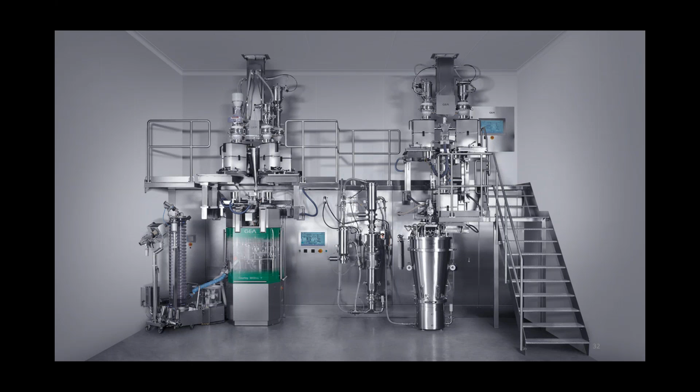The next categorical in this chemical manufacturer is pharmaceutical manufacturing. This is a picture representative of a small pharmaceutical process. Some processes can be large, some can be small—it all just depends on what they are doing at your facility.

So what do you want to look for when you go to a pharmaceutical manufacturing facility? What types of processes are used to manufacture the products? Depending on the process, that can depend on the category and the regulations. What steps in the manufacturing processes produce wastewater? What types of solvents are used? How are spent solvents disposed of? Is raw water intake purified? What frequency is equipment washed down, and what is the volume of wastewater generated? And is there a research lab in the plant?

These are all great questions to ask your facility as you go on an inspection. We also have multiple pharmaceutical manufacturers in the city of Salt Lake, and it has been very interesting to work with them on various issues. As pharmaceuticals become more of a hot topic, how are pharmaceuticals disposed of?

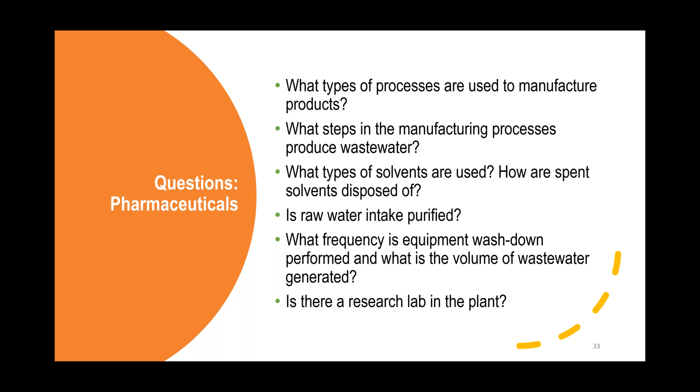Okay, and then chemical manufacturing. Since they are a chemical manufacturer, let's talk about what to look for at a chemical manufacturing plant and some of the things we have found as we have gone on our inspections of this facility.

It's very important - you never know where you're gonna find issues when you go on inspection. So it's always important to keep your eyes open and constantly look about and see what is going on.

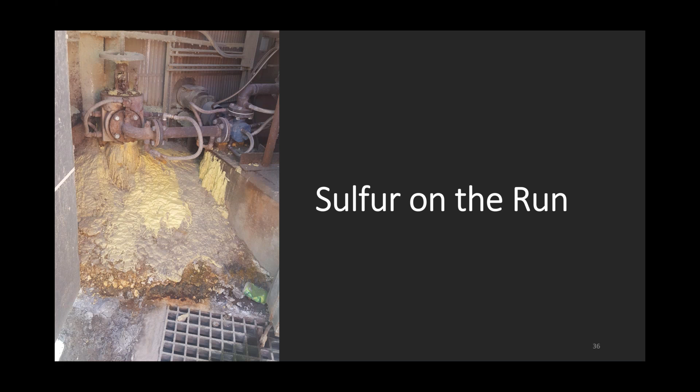This is a picture of an access point on their facility. They had an SSO event. It wasn't very large, just enough to fill this little containment structure, but they were too lazy to clean it, and they just left it to dry, which is very disgusting and can also be a public threat to health and to the environment. I would have never expected to find this at a facility. Once again, the city required them to clean it up and to submit evidence of the cleanup once they were done with this.

They are a large facility. They have over 17 buildings, many acres, and they have totes upon totes upon totes with barrels upon barrels upon barrels around their entire facility, but the majority of them aren't labeled. As an inspector, this is frightening because, hey, what am I walking into? What are these chemicals? Are they compatible? What are they doing there? And why are they not labeled? Sometimes it can seem a little suspect. So it's very important that everything is properly labeled so that the facility knows and that you as the inspector know what is going on as you walk around the facility.

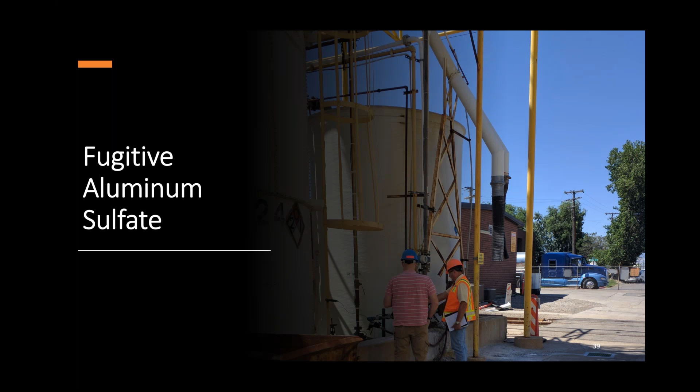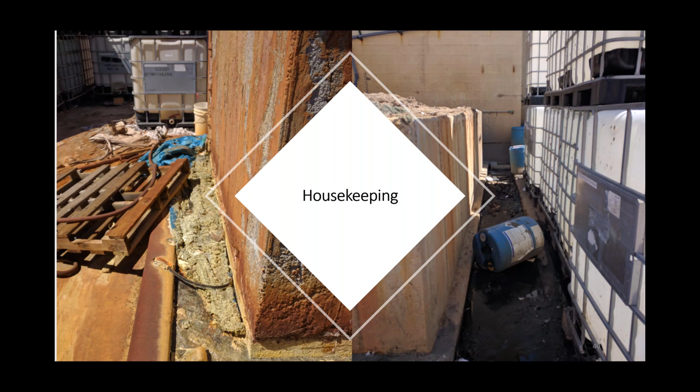Another thing to look out for with a chemical manufacturer is color, and we have a great relationship with our collection system. They'll be cleaning the system by this facility and they'll shoot us a picture and say, hey, I noticed this color coming out of their line. What's going on? What are they doing today? And then that allows us as the pre-treatment program to say, hey, look, we have a picture. What are you discharging today that is not normal? It could be anything from cleaning their ferric lines to doing some other manufacturing process that the city wasn't aware of. It's always great to have that relationship with your collection system where you can work together to identify and hopefully resolve issues.

And then, this facility is right in the middle of a public roadway and decided to stage barrels upon barrels upon barrels of chemicals on the roadway. This is a great concern. What if the forklift missed and punctured the barrels? Though it would probably go to stormwater and not sewer, it still is a huge safety concern to the public. So you never know what you're gonna find. It's always a surprise.

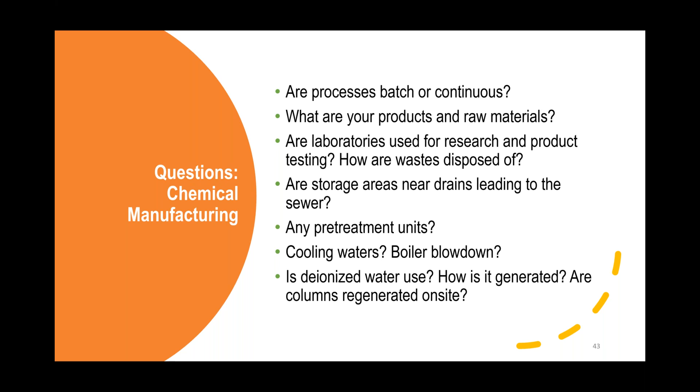So in conclusion, we know that every industry is different. It is so important for us as the inspector to do our research before an inspection, learn about the industry. When we go on site, they see us as an expert, and so we need to have that background knowledge to be able to effectively conduct an inspection, regardless of whether it's a brewery, a refinery, a pharmaceutical manufacturing facility. We, as inspectors, are required to have a vast knowledge base.

Inspect with your eyes wide open and ask lots of questions. There's never anything wrong with wanting clarification or wanting to see what's behind the door or wanting to understand what the process is and how the process works. And also, we just never want to forget what our goals of pretreatment are, and that is to protect the POTW, the workers, and the environment. Those really are our goals when we go into our permitted or unpermitted facilities and inspect them: we want to ensure the safety of the workers and us and the environment.